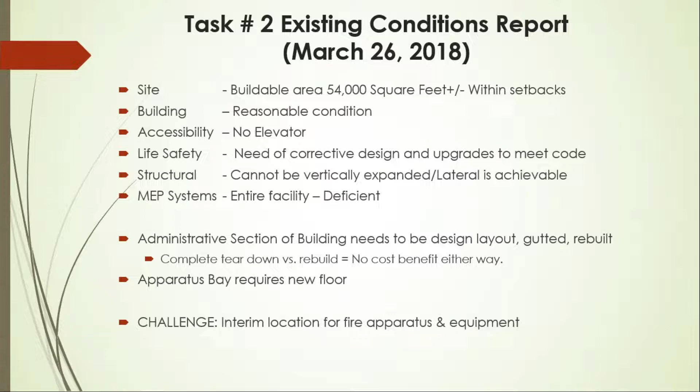One of the real drawbacks to this is you've got fire apparatus leaving, police apparatus leaving, and it's the same common entrance for the general population coming in to conduct day-to-day business. This is one of those issues which made this site extremely challenging.

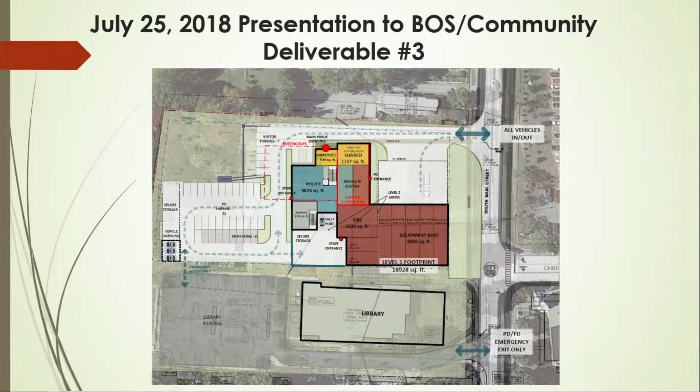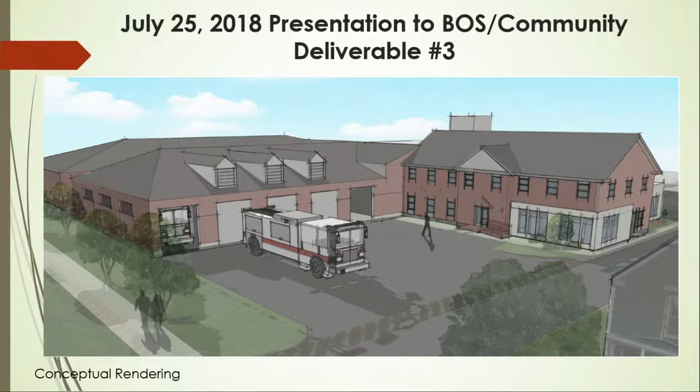That site is 1.9 acres, plus or minus. All the architects we've spoken with agree a combined facility with the needs of this community and the departments really should be on a 3.5 to 4 acre site. That's really challenging to put that type of property together for us to build a standalone facility with the infrastructure needs.

Today's price tag is $16.2 million for that project. In 2018, it was estimated that in 2021 it would be $12 million.

All the operations of everything—police, dispatch, fire—are all going to be disrupted during construction, and it leaves no room for future growth. Once you build it, you're essentially locked there permanently.

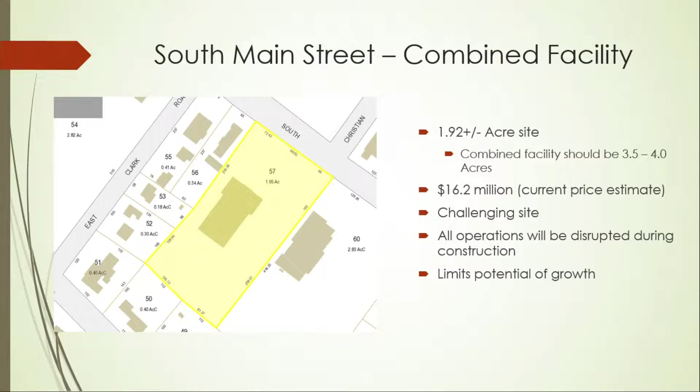Here are the two comparable budgets from 2018, which again, the estimated cost of construction in 2021 was just over $12 million. Then this fall, or last summer rather, we had this revisited, and the price tag came in at essentially $16.1 million for a 2023 construction.

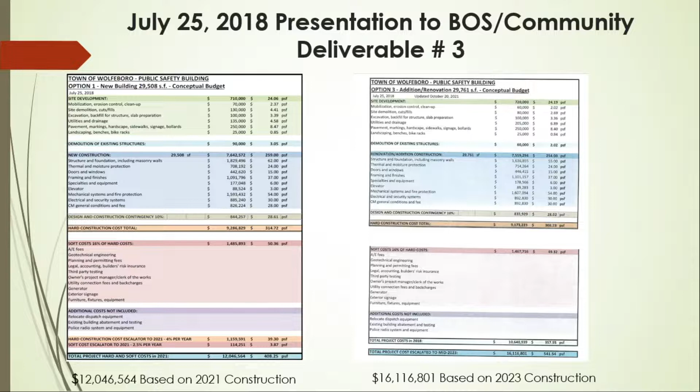So if we were going to look at this option for 2023, you're looking at a bond that's going to come in front of you for at least $16 million. So what does that translate to? A $16 million bond—we took and ran these numbers with the bond bank to get an estimate of what it would cost us.

Simple math with these numbers: a $300,000 home, you're looking at $180 on your tax rate for a 20-year loan. If we did a 30-year loan, that same $300,000 home would be $168. So that 30 years really doesn't pay to do that—you're saving about 2 cents on the tax rate, and you're extending it out an additional 10 years. So for all intents and purposes, we'll probably go with a 20-year, which also gives a lower interest rate versus a 30.

So we completed that in 2018. We talked about what we had to do next. We began to evaluate some options.

Option one was to look at a standalone police station. It requires a minimum of 1 acre of property. We felt that that was something we could probably figure out.

We looked at a standalone fire station. Some of the requirements for a standalone fire station were municipal water, and it really needed to be on a 3-acre lot, with the police department remaining at the existing facility. We didn't have a whole lot of luck finding a 3-acre lot where municipal water was accessible.

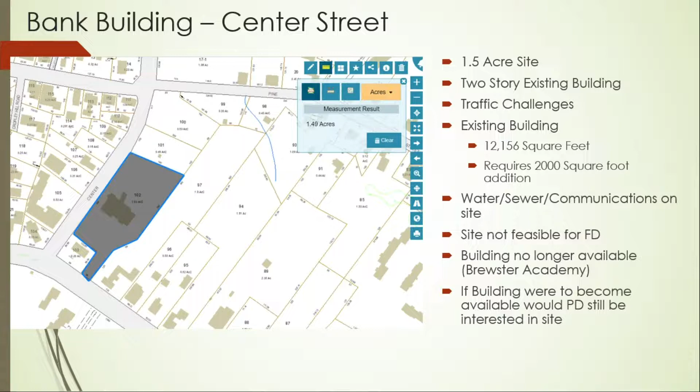Again, it was determined not to be feasible for a fire department due to the angle of departure and approach of fire apparatus on the hill. And as we put the space programming to it, the building was sold. So we were actually doing some work on it, and then it became unavailable to us.

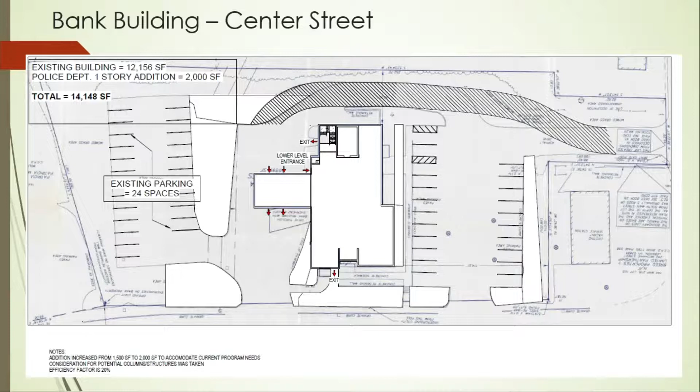Here's the site again, just to give you an idea of some of the work that was completed on it. And here is actually some programming—all those little squares we talked about, broken out and laid out for the police department. It actually worked out splendidly as an option. However, it was purchased before we could really get beyond this point.

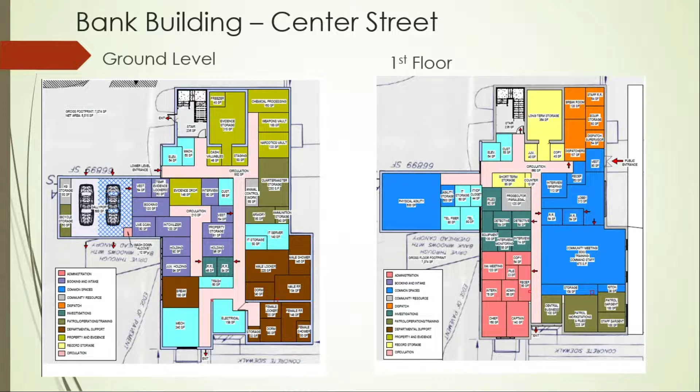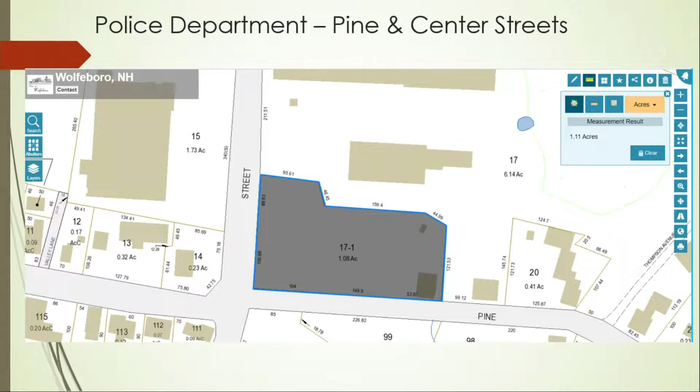Then we looked at the Pine and Center Street, or Zimmerman lot, 1.1 acres. It actually turned out to be a very good site—again, it's got town water and town sewer. We looked at it from two different perspectives: a one-story building of 12,586 square feet, with a footprint of approximately 152 by 100, and a two-story building of 13,900 square feet, approximately 112 by 100. Water, sewer, and communications all readily available, good parking, good access and egress for the police doing their business. Unfortunately, we weren't able to purchase the property.

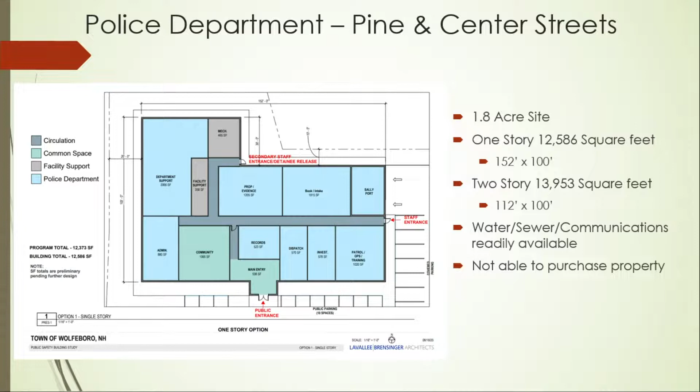So we then looked at Filter Bed Road as a committee. The location is near the wastewater treatment facility, town water, town sewer, communications. However, it was ruled out for a few reasons. One, it's not a through road, which was concerning. It places police and fire in a residential neighborhood and doesn't give them great access to get anywhere in town without it being a through road. There's also a desire for this to become a municipal parking lot. But the main thing here was the only way to service the citizens of town is you'd have to go through a lot of residential areas on Filter Bed Road.

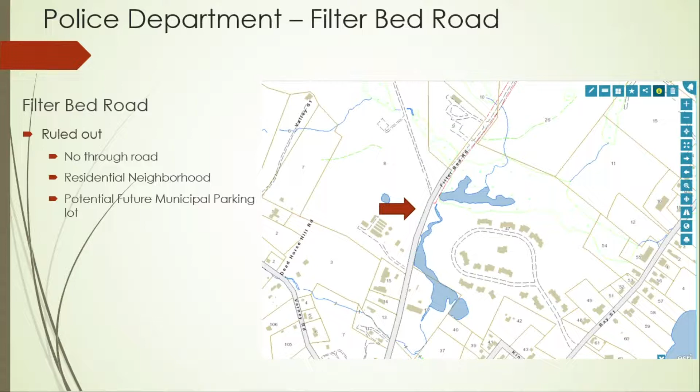So that was why that was ruled out. We discussed a piece of property on Pine Hill Road between the SAU building and PSI Plastics. It's a town piece of property that we own, and it's a fairly large-sized piece of property. However, when we looked at it, site development was going to be challenging because it's all poorly drained soils, and there would be a lot of site development with tree removal that would have to take place.

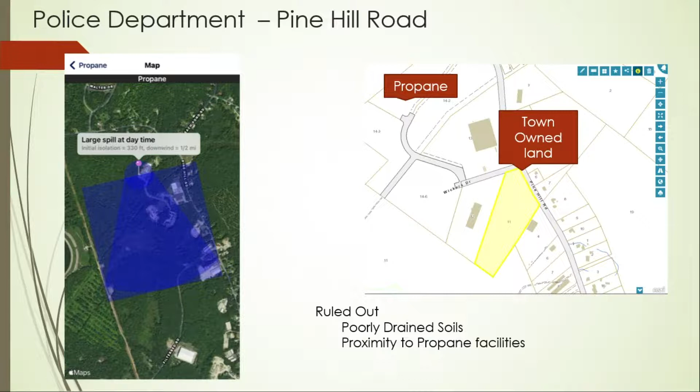And the other thing that was problematic with this one was when you took the propane facility for Eastern Oil right here and put a large leak onto that over the hazmat software, it put the facility right smack in the area that you would have to be evacuating. Therefore, it didn't seem to make a lot of sense to put a dispatch center with police department employees or fire department employees in that location.

If there's a major leak, we're going to have to evacuate the property. So that's how we got to North Main Street. This was a piece of property that the town owns. On the town tax map, you can still see that we have the water tower identified on it. So we actually had Norway Plains come out and do a site survey, produce an existing conditions report, and it came back favorable to be able to put a police station here.

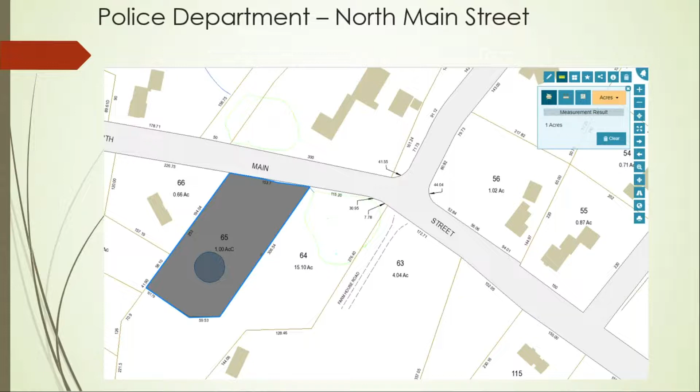So we went forward, we worked with the architect, with the programming that we had developed, and we looked at, can we build a single-story building here? Came back that we really couldn't, but we could do a two-story building. So we went through a series of renditions and came up with a space programming. This is kind of what the building would look like, with some parking for staff and some parking for citizens.

Again, it's a 1 acre site. The building is approximately 13,500 square feet. Dimensions about 70 by 100. Couple of complications on this site due to its elevation. It would likely require a fire pump for the sprinkler system, and it would also likely require a pump system for the wastewater. However, water, sewer, and communications are all readily available at the location.

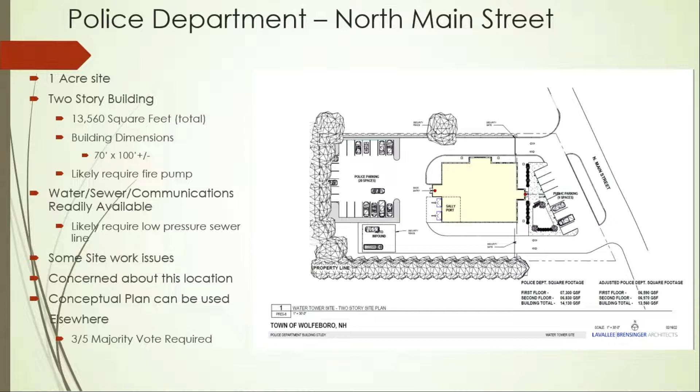We have identified some site issues with infrastructure that's still in the ground for the water tower. However, that's in the back of the facility property, and it would be covered up with the parking lot. We would, for all intents and purposes, try to move most of it, but it wouldn't impede the construction of the building. And the nice thing about this conceptual plan that we've put together is it can essentially be used on another piece of property. If we can come up with another piece of property that works, we may be able to utilize this particular footprint for another site. So this is kind of a layout of the building.

This would be the first floor. It has a sally port for law enforcement bringing prisoners in. It's got secure access to their booking area. It leaves room for their dispatch center on the first floor. It has a training and conference room for the police commission with a small kitchenette. And then there's a significant amount of evidence storage with a variety of different rooms for storing valuables, cash, weapons, narcotics, and a complete processing room for that. It also has mechanical, janitorial, and trash receptacles, all on the first floor, and an entry vestibule that would be open to the second floor. So that's kind of the layout of this first floor of the building.

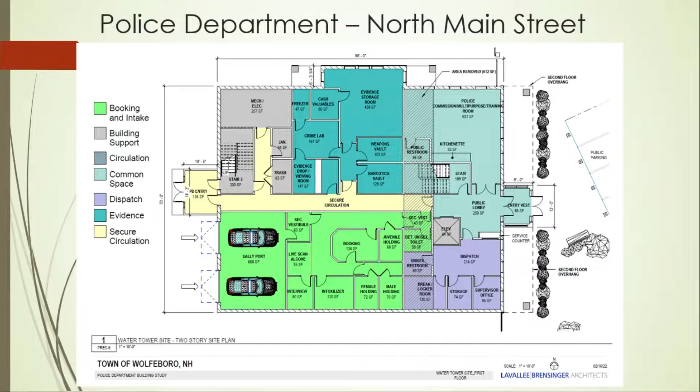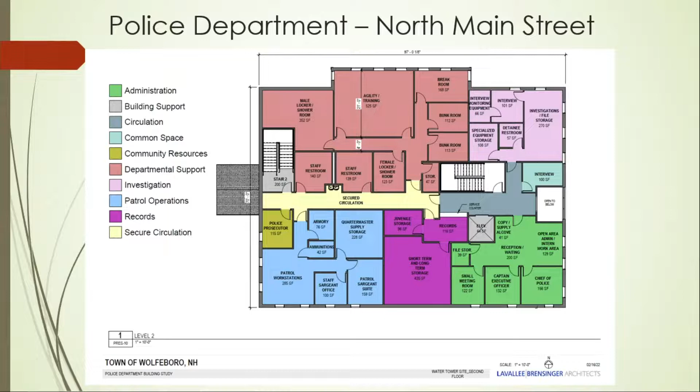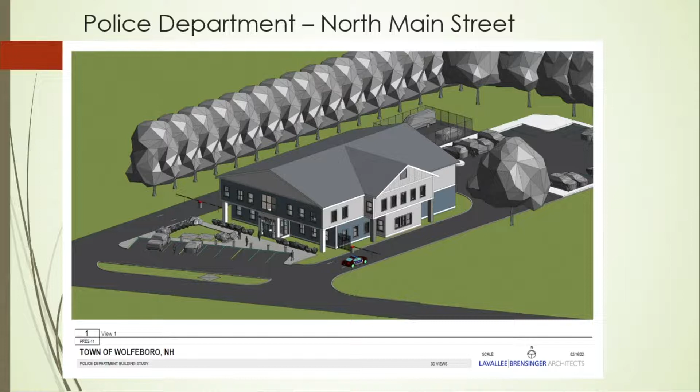Again, this is just a basic rendering with some trees. I know there's been some question about the accessibility of this and the line of sight. We frankly have not studied the line of sight. That's what tonight's about, and if we get the direction that people seem to want to go, that line of sight issue will be discussed.

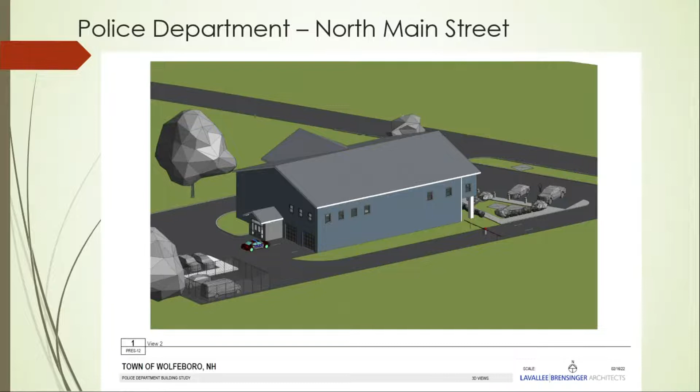Different view of the same facility. Price tag for this particular project is $6.6 million.

To give you an idea of what the payments on a $6.6 million project would be, for a $300,000 home on a 20-year bond, the first few years would be $75. If we did a 30-year bond, the first few payments would be $69 on that same $300,000 home. So again, it makes sense to look at that 20-year schedule versus the 30.

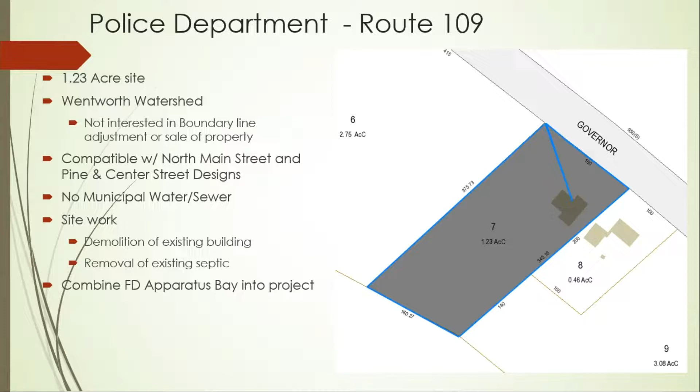As far as this site is concerned, I think the fundamental question for citizens is, do you want your police department located in the downtown corridor, or do you want them located out of town? The chief will tell you that he doesn't have a terrible problem with it because his officers are on the road for the most part, so it doesn't really concern him one way or the other. When we get into the question and answer period, if you have questions for the chief specific to that, we'll let you have the opportunity to speak to him.

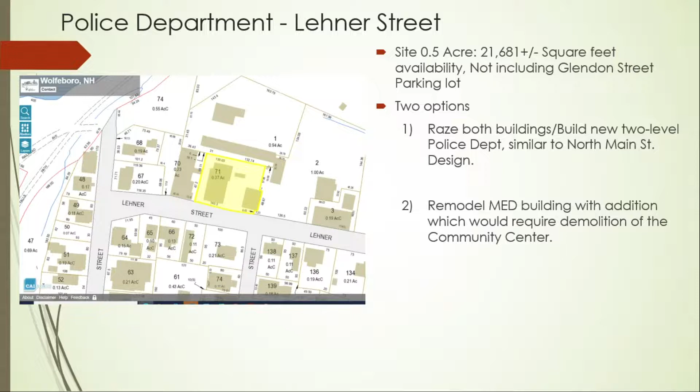Again, this building was identified in the 2019 master plan. A couple of interesting statements about it: given its walkable access to downtown and public recreation sites, as well as newly constructed nearby parking, this lot should be considered for future use by the town. Well, here we are talking about it. Public comment supports reuse of the structure as a teen center, senior center, or a generational community center, or use as a retail space should also be considered. Well, we're here talking about it as a potential police station.

In 2020, a group of Girl Scouts came in with a petition warrant article asking for $25,000 to perform a feasibility study of the building. You, the voters, approved that.

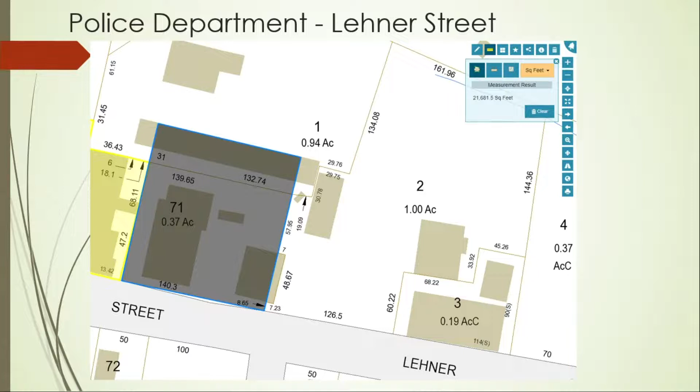Here's a tax map showing the Glendon Street parking lot, which is essentially a 21,000 square foot area. Can we place a 13,000 square foot facility inside of that window? If you look at the next page, 21,681 square feet are available based on that square I drew backing up to the Glendon Street parking lot. The North Main Street square footage of the first floor was 6,590 square feet, so yes, it will fit in the footprint of that piece of property.

And the way the property tapers, it makes sense to have a two-story building there. A single story, similar to Pine Street, would be 12,000 square feet. So could a single story building be put there? It could be, but I don't think it makes a lot of sense based on the contour of the land.

Again, no feasibility studies have been done on this, so we don't know what's going to happen when we dive into that.

So really, I think we've got two options there, and these are options 4 and 5. Raze both buildings and build a completely new facility, where the square footage works, or rehabilitate the MED building, tear down the community center, construct an addition onto the MED, and see if that can work for us. I think that's a viable option.

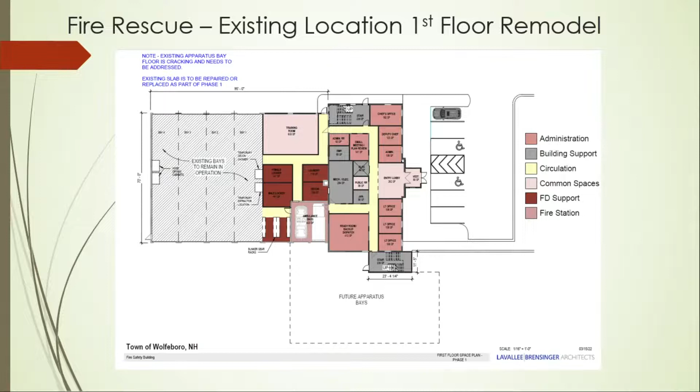This also takes care of some accessibility issues. Again, this would be a complete gut of that building, starting from scratch on the inside. The second floor would basically be living quarters for the staff, and it would be set up so that we'd be able to do phase 2 at a later time.

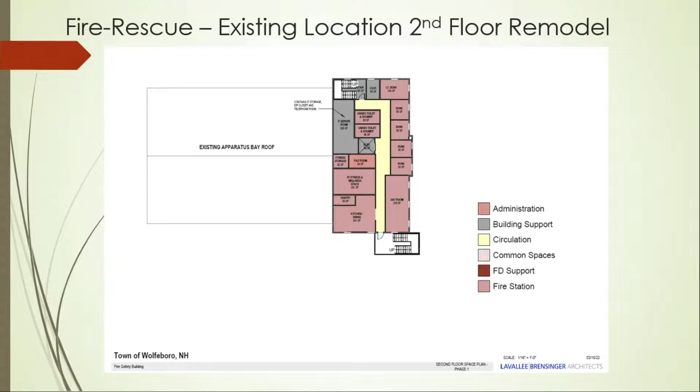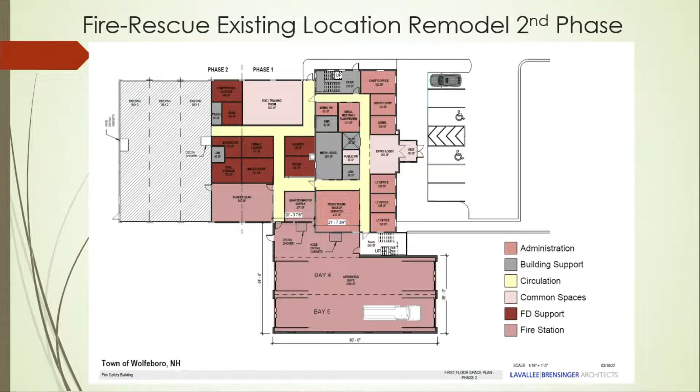This would be phase 2. Phase 2 would essentially add on two apparatus bays to the side of the building and provide a straight shot toward the street, getting them back to the square footage they require for future growth. This is kind of what it would look like when it's all said and done.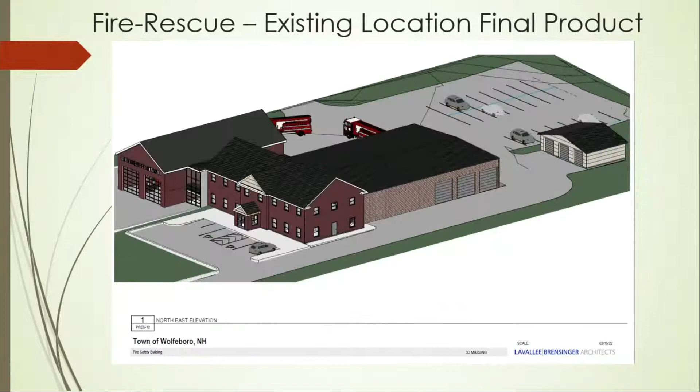Does this look any better than the previous option? I think it looks a little better, and it's definitely better from a safety standpoint, for being able to access the street without citizens using the same entry as fire apparatus leaving the facility. You would also have a small garage built on the back of the facility for storage of ancillary equipment. You can see that small garage right there.

This particular project, phase 1, is estimated at $4.2 million. If you were to add up the 4.2 and the 6.6, that brings you to about $10,800,000. So what does that mean?

You look at the bond schedule. This particular project, tied in again with North Main Street, on a $300,000 home, would be approximately $120 a year increase on your tax rate. A 30-year note on that same $300,000 home would be $111. So again, it doesn't make sense to stretch that out an additional 10 years.

From tonight, we'd like to hear some feedback from you, the citizens. We, as a committee, will convene Monday in the library to discuss the input we've received, and deliver that to the Board of Selectmen, hopefully on the 15th. From that point, our intent is to have some direction, put out an RFP for architectural and engineering drawings, and get a construction manager on board to give us a guaranteed maximum price for the 2023 bond hearing.